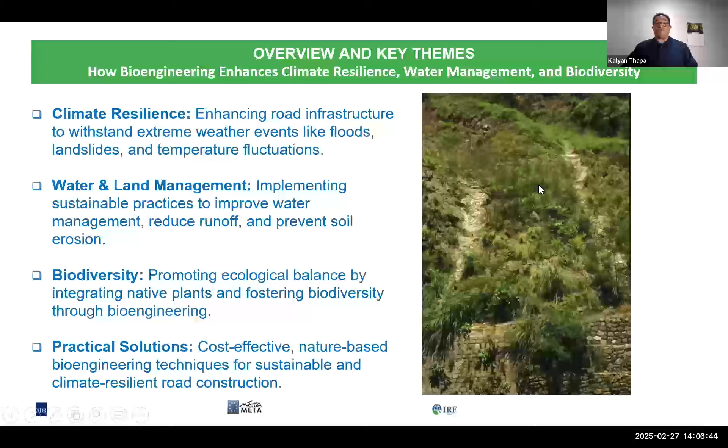On the slopes here, gully erosion has been protected by using stone pitching and check dams, and on the roadside there are retaining wall structures and different kinds of vegetation approaches on the slopes for the practical solutions. So these are the key themes of our session today.

Here, I tried to touch on advancing the UN Sustainable Development Goals through bioengineering in road infrastructure. It is quite fortunate to have bioengineering in transport sectors focused on by the UN Sustainable Goals by 2030. The slide I have taken from Mr. Slobodan. He has written wonderful articles on the report's sustainability 2021.

I highly encourage you to get these articles, where he has focused on how bioengineering can emerge in every sector of infrastructure for climate resilience purposes. So there are four or five UN sustainable goals, and UN Sustainable Goal 13, climate action, helps reduce carbon footprints and improve climate resilience.

And life on land, SDG 15, supports biodiversity by restoring habitats along roads. And clean water is the biggest issue. With bioengineering, it improves water management and reduces runoff.

This pretty much ties into the work of experts like Mr. Slobodan, who discusses bioengineering's role in climate resilience infrastructure. So please look into his article too. He published that article in 2021, which is currently focused on bioengineering in the UN Sustainable Development Goals.

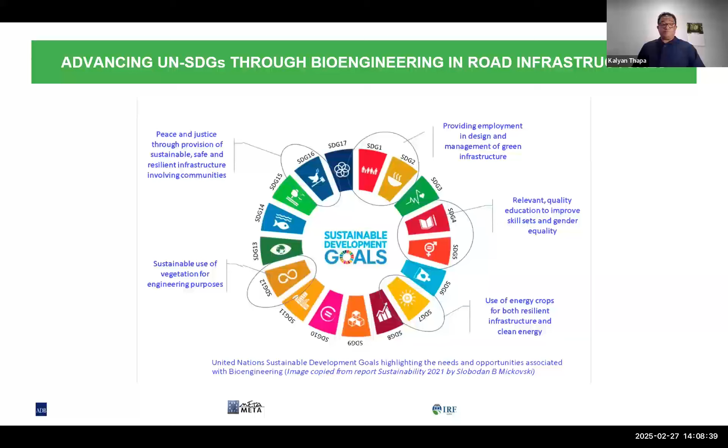So my fourth slide is about climate risks in green road infrastructures. Here we see different pictures of what roads face from climate change and the risks to the roads, including flooding, gully erosion, and landslides. These risks damage infrastructure and disrupt travel. Implementing bioengineering techniques like stabilizing slopes and managing water flow can help mitigate these challenges and make roads more resilient to climate impacts.

So these are generally not only for green roads, but any transport sector you will see due to climate change. These are the areas: big gullies, landslides on the roads, even in the communities and habitation areas, big landslides, because these can be caused by both natural and man-made causes. But due to the climate change effect, these are the main areas we are facing in the climate risks in green road infrastructures.

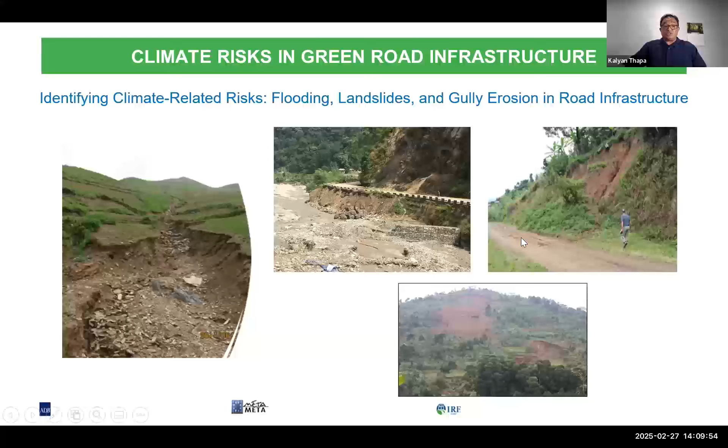So on my fifth slide, we examine how erosion impacts green roads and how bioengineering can address this issue. The images showcase techniques like planting native vegetation, using erosion control measures, and implementing natural retaining walls. These solutions prevent soil erosion and improve road resilience. I think it is very essential for professionals to understand local conditions, soil, vegetation, and weather patterns. When planning bioengineering solutions, engaging local communities ensures the solutions are sustainable, effective, and culturally appropriate.

So you can see in my photo on the left, some of the slopes need land use management and different kinds of techniques. And in the photos on the right, gabion walls or retaining walls are needed, and debris removal is needed. So what I'm trying to insist here is that any of the experts working on bioengineering in the road sector, basically in green roads, have to be able to assess this in great detail. So these are the effective measures for erosion control and slope management, if you have detailed assessments of the roadside slopes.

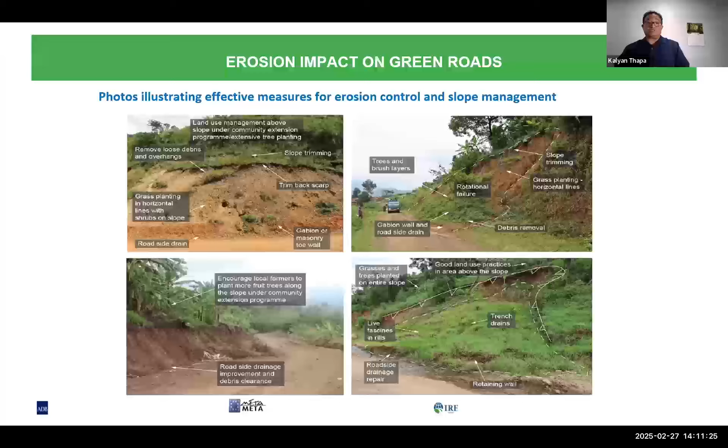So on this slide, I'm slowly merging into bioengineering for slope stabilization and erosion control. Sustainable solutions for a resilient future. What is bioengineering? Why does bioengineering matter? Global application of bioengineering and proven techniques for success. Bioengineering is a very powerful method for slope stabilization and erosion control. By using natural materials like plants and grasses, it addresses erosion and slope instability in an eco-friendly way. This approach not only stabilizes slopes, but also enhances ecosystem restoration, creating a harmonious relationship between infrastructure and nature.

Bioengineering has proven very effective worldwide, and the practice started from the east, where I started from the very beginning, in Nepal, and slowly it came to different Southeast Asia and Pacific regions, and now it's also starting in North America. So these are very cost-effective techniques. As you can see in the pictures, some of the techniques we are using are very much nature-based and have a carbon zero effect. So that is what bioengineering does on roadside slopes. So it's a global practice, and there's a standard developed. It's very much used worldwide so far.

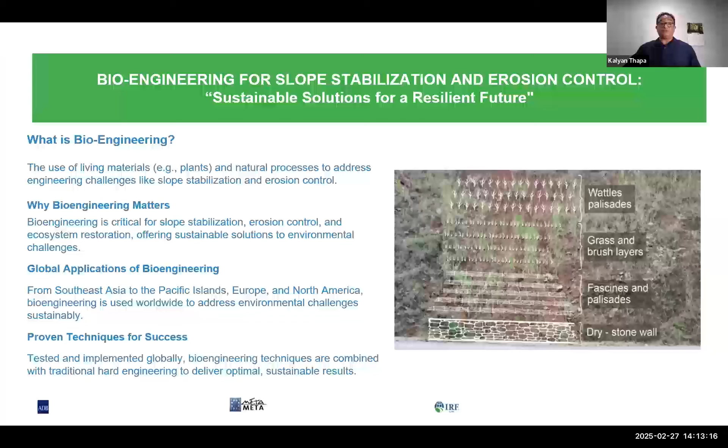Okay. Then we have to understand the benefits of bioengineering, why we need to address bioengineering. What is the effect? So I'm trying to show here the environmental, economic, and social benefits. Environmentally, it restores habitats, improves biodiversity, and reduces erosion, making ecosystems more resilient to extreme weather. Economically, it is a great cost-effective alternative using locally sourced materials and reducing maintenance and repair costs over time. Socially, bioengineering fosters community engagement, improves local knowledge, and creates a safer, greener environment that enhances the quality of people's lives. In short, bioengineering not only supports sustainable infrastructure, but also contributes to environmental protection, economic growth, and community well-being.

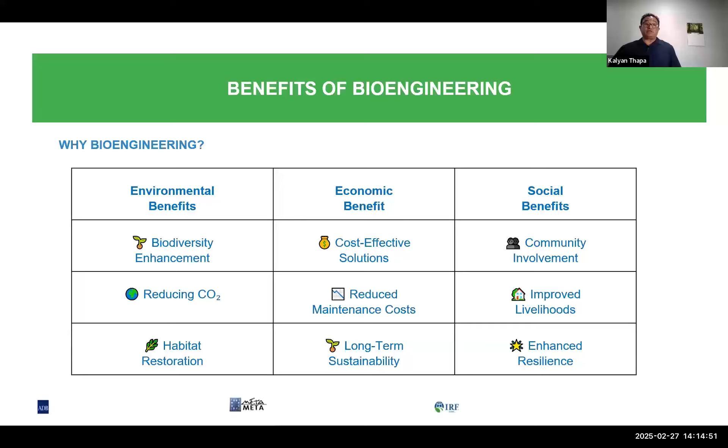So there are all these three sectors. If you work at a very micro level, you will get all these three benefits implementing bioengineering in any infrastructure, not only green roads. Any infrastructure project can have all three of these benefits while implementing bioengineering techniques. So this is effective bioengineering practice.

I'm very much fond of this slide, though this slide's so very old, and I'm very nostalgic also, because this is all I've taken from Nepal, where I started my career in bioengineering, and I worked with very reputed bioengineering consultants like John Howell and Dr. Jan Clark, Dr. Krip Lawrence in Nepal.

These are the pioneers of bioengineering. We started bioengineering in Nepal. They used to say not bioengineering, not nature-based; they simply used to say soil conservation when we were starting bioengineering in Nepal in 1986. And they were ahead of time. And on the slide you can see in picture one.

There are lots of practices like cut and fill practices, which created lots of problems during the time. The haphazard practice of soil dumping causes lots of problems. Not only the erosion, but it also damages lots of natural heritage and natural resources there. But there was also a practice of how we could protect that.

Like you can see on photo two here, the gully is strengthened using beautifully created small check dams. These small check dams were very much useful for strengthening the gullies. And in the third picture here, you see stone pitching on the small gully.

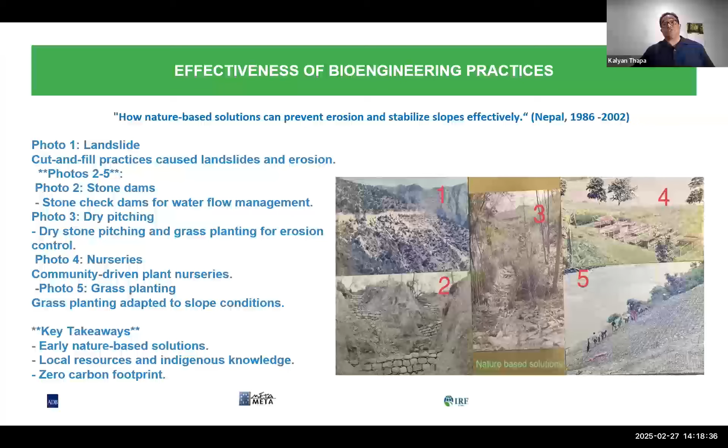So these are the effective bioengineering practices. It doesn't mean they have not been carried over; they have been carried over. But this was the practice at the time while I was working in Nepal, from 1986 to 2002.

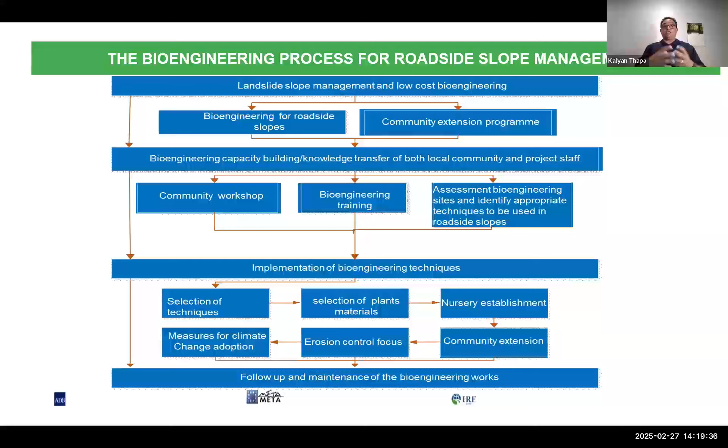Why I've been insisting on a community extension program here is because most of our roads nowadays either cross through community lands, or even if you build the road on isolated land, the community inhabits the newly built roads. So we should be working in conjunction with the local community for successful bioengineering implementation in any of the road sectors.

So I'm showing here the process, how we can train to do proper bioengineering, like a community workshop on bioengineering techniques, and we need to know how to assess a bioengineering site, then implement bioengineering techniques, with proper selection of techniques, and our focus should be on erosion control, but for the benefit of communities living around the land. So this is the process we generally developed now to work on any green road infrastructure, regardless of whether it is community oriented or not.

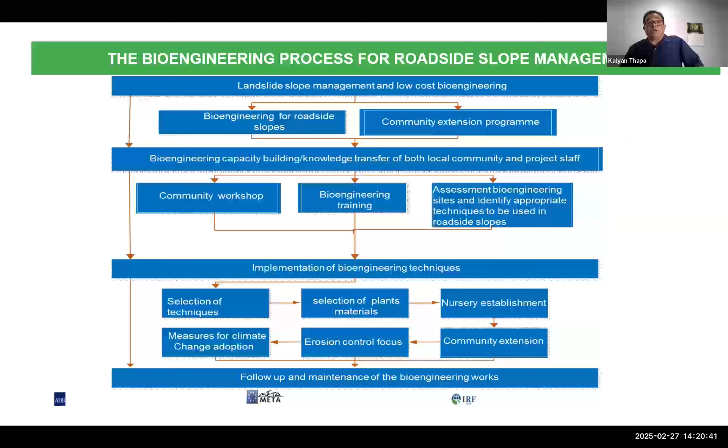In the next few slides, I also focus on the case studies and best practices of bioengineering around the world. So this slide is from Nepal, combating landslides with bioengineering. So what were the challenges, what were the solutions, what was the outcome? This one slide shows the roadside slope erosion that was there.

The challenge has always been that whenever we cut slopes and leave a bare surface, the slope starts eroding, regardless of whether it's small or large. And then what happens? There are big landslides, or even if there is no landslide, even if you cut the slope at a certain angle, it still gets surface erosion and starts blocking your beautifully constructed drain, and that leads to another problem.

So while you're implementing, if you focus on those challenges, or to prevent those challenges, just simple grass planting like this here, or brush layers, or different other techniques, implementing them can resolve the problem. So what would be the outcome? The outcome would be successful green slopes without any signs of erosion, and it can be useful for the local community. The local communities can get benefit out of it, and it will be more long-term sustainability.

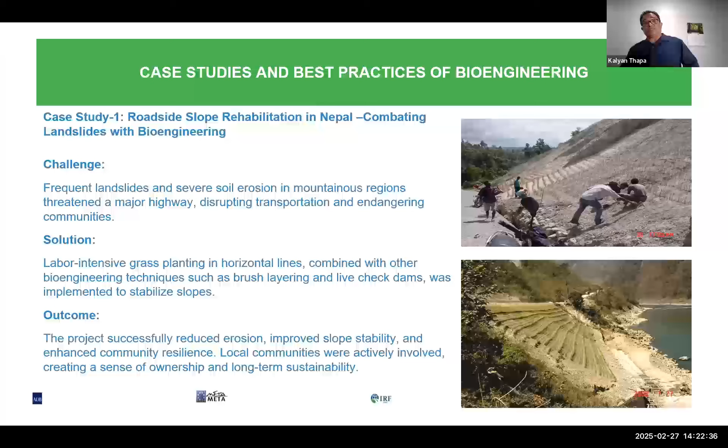But what we do there, very simple bioengineering techniques, like simple rows of grass plantings, brush layers, helps a lot. But we need to know how to implement it, right? This is one of the sites in Nepal. And here, case study 2 is a project in Laos. They also implemented slowly the bioengineering of the slopes.

See on the side here, the same challenges like frequent landslides and severe soil erosion in mountain regions. It's always a problem. The mountains and slopes are very fragile, very unstable, very young geology. So severe erosion problems, and that impacts the livelihoods of the local people. So solutions like simple plantings, just focusing the bioengineering or vegetation techniques on the slopes, the roads become very healthy. It looks very, you know, environmentally friendly also.

And it looks wonderful. If you see the slope, the picture at the bottom, see the beautifully constructed retaining walls and the slopes are vegetated, green. And if you drive on this kind of road you won't see any signs of soils accumulating, debris accumulating on the drainages. So that successfully reduced erosion by 50%, improved slope stability and enhanced community resilience.

And what we'll get, the community will be very happy, and the maintenance cost for the road itself, not the slopes, but the roads itself will be much less, because if there are no soils on the drainage, drain cleaning cost is going to be reduced. But imagine if you don't have anything done on the slopes, there's going to be a huge problem. Either it's going to create a big landslide, or continuous erosion is going to bury all the roads or the drainage. Okay, so those are the outcomes of implementing or practicing bioengineering.

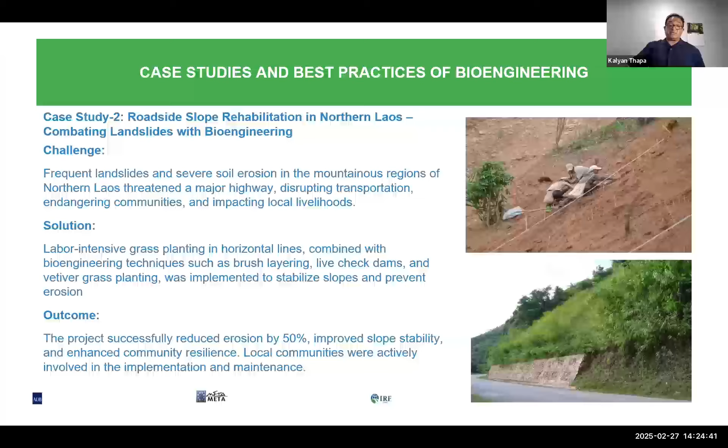There are not always good practices also. Some of the things they try. This is one slide from Bangladesh. The challenge was slope erosion, and the practices done were this kind of sandbag filling, and you often see those kinds of practices, either covering the slopes with tarpaulin sheets or sandbags or huge riprap techniques.

Are these techniques always good? As an expert working in bioengineering, I would say no, because these are very temporary measures, because you always get problems, because underneath there's always erosion. So these are not very permanent practices. So we suggest to put more vegetative measures. There are other vegetative measures which are going to be sustainable, long-term, and more effective. Because when you put the sandbags here, it's maybe 1 year or 2 years. After that, it's going to deteriorate and the whole slope is going to move again. So the situation will be the same.

So if you put more bioengineering measures like vegetation stabilization, live drains, brush layers, it all depends on the site. That's why I was talking in my first slide about assessment. What are the techniques needed? What are the problems? So if you properly assess the sites, then we can fix those with green bioengineering techniques, which will have ecological benefits too.

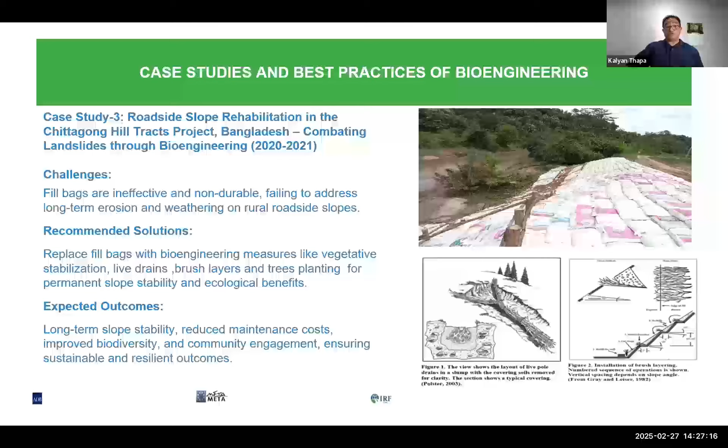So this is one slide in DPR Korea, usually we say North Korea. I was fortunate to be there and to do the work with the SDC, Swiss Development Cooperation, from 2015 to 2020. During that time, one of the very serious problems was soil erosion in North Korea. And that's not for the structures, but I see the problem for food, because they had to use all their lands to grow crops. Without using their land, they don't get food. So over time, using the lands, there was so much erosion.

And then SDC came forward to mitigate that erosion problem using different expertise: agroforestry, foresters, and I was the one working on the bioengineering, how we can reduce it. It had huge gully erosion problems, using the land too much.

So I was able to do pure nature-based solutions using only the plants and vegetation, because there was nothing we could get there. No way to get any kind of engineering materials there in North Korea. So I had to rely on totally nature-based solutions, training them how to use all the effective bioengineering measures, different structural techniques. So this was the turnout.

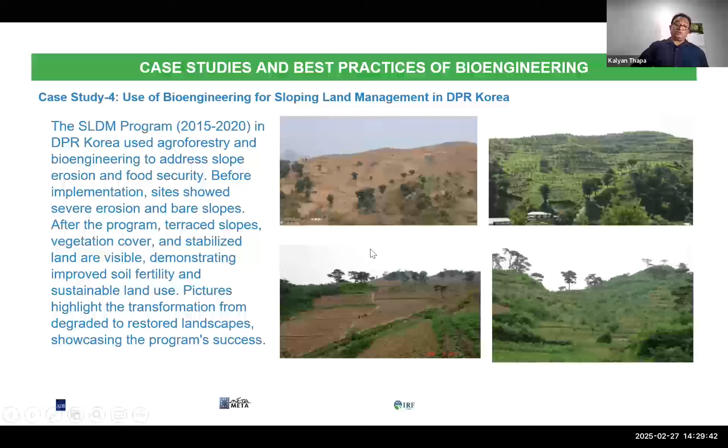So one of the very successful projects, working with the local community and using natural solutions. One of the most successful projects I was ever involved in during my career. And I'm very satisfied working there with the communities in terms of erosion control.

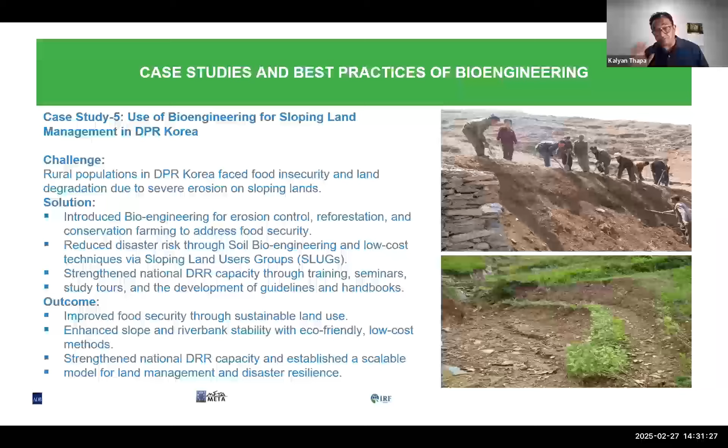And I was one of the fortunate people involved in utilizing different plant materials. Fortunately, there are some species which grow on very toxic materials, like willow and cottonwood species, which are very popular here in North America. So we used these for the toxic materials, because the roots extract the toxic materials and evaporate them to the environment through the plant systems.

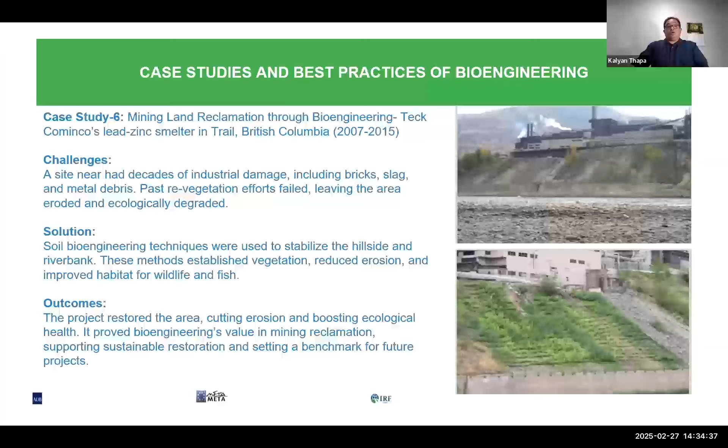If it's very wet, it doesn't stay that long. Even if you have a treated log wall, it has a lifespan of 10, 12 years, but after that it's going to start deteriorating. So what we did is we just replaced these walls and started a vegetative wall. So we put in the vegetative wattles.

So we suggested a very friendly, low cost and sustainable technique, which was a bioengineering wattle fence. So you use the wattle fence, and within one year, that turns out very green, very stable, and it's a very simple technique. It looks very simple, but if you do it very technically and with some knowledge of the slope conditions and slope failure, we can get success on bigger slopes as well.

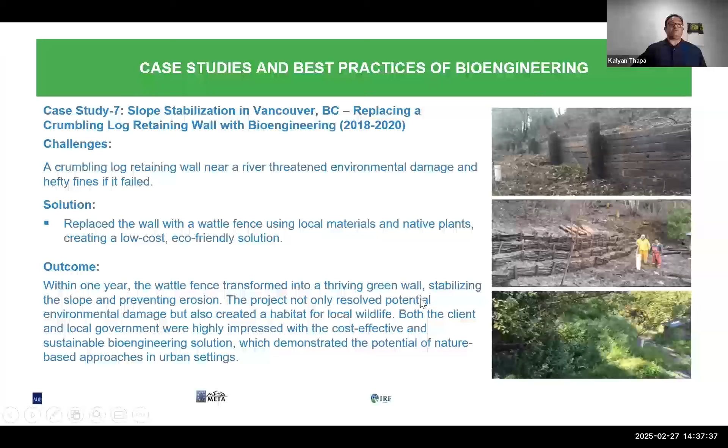But it all depends on what kind of materials you have. It also depends on the plants. You need to have plant selection, natural and good growth, good cuttings. If you get good plants, it can stabilize the slopes. But this is mostly biotechnical structures like wattle fence, live pole drains, planting cuttings. These big slopes all stabilized. Mostly the outcome was site rehabilitated in 1 year, reduced seepage erosion, mud flows, stable slopes with thriving vegetation.

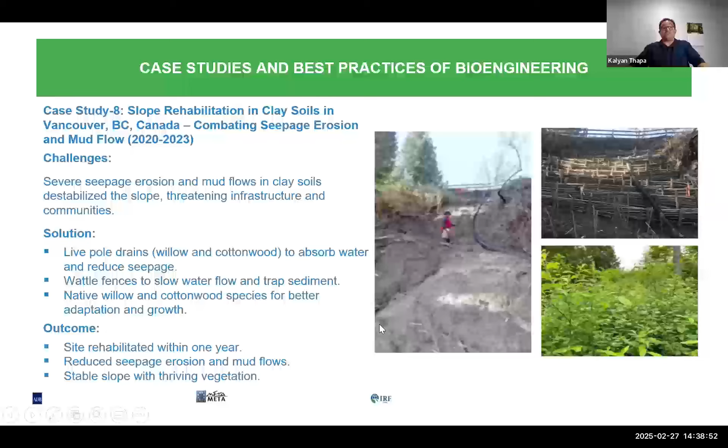And in the practice of bioengineering, one of the very best techniques for riverbank protection in the aspect of fish habitat is called vegetated riprap. So if you see any culvert abutment fail, bridge abutment fail, it can be fixed with simple vegetative techniques. The vegetative technique is using different sizes of rocks and planting cuttings in between the rocks, which can grow. There is a certain way to do it, but it's a very simple process; sometimes we can use a machine, sometimes we can do it manually. So it can fix small to large scale failures, embankment failures.

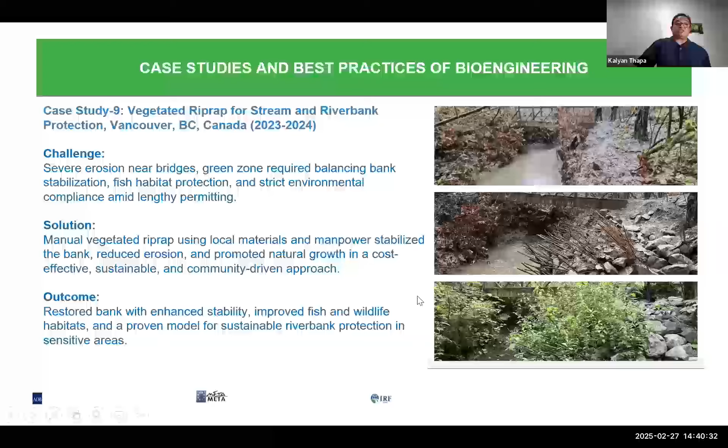In Europe, they have been using it a lot. They have been demolishing all the concrete structures and putting vegetation riprap on the big riversides. Before, they used to do all cement structures. Now, looking at the environment friendly and green aspect, they've been using this vegetation riprap. Vegetation riprap is one of the best solutions for fish habitat. The fish love it. In the third picture here, when the plants grow, the fish come and hatch. It's good habitat for the fish. So this is a very simple technique we can use as vegetation riprap as part of bioengineering programs.

So yeah, those are the few slides on the case studies on bioengineering. But now I want to go more into empowering youth and communities, how we can participate in the communities and bioengineering, and what the advantage is.

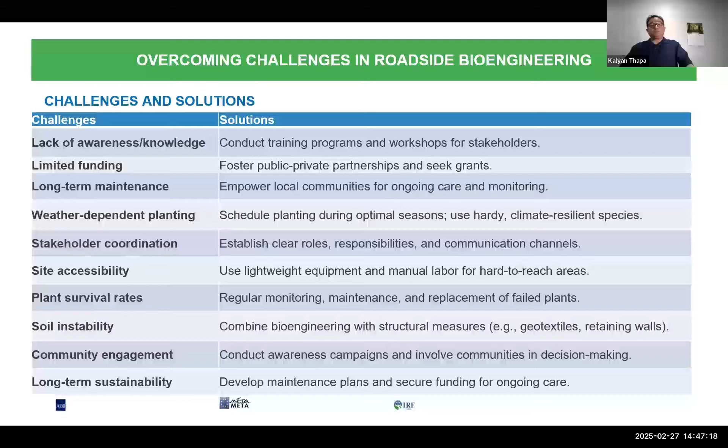So if you look at the challenges properly, have proper solutions for them, and do micro studies in this area, the ultimate goal is successful bioengineering by overcoming the challenges. There will always be solutions. But most of the time we have not been looking in detail at these challenges and solutions. So if you look into these areas, it helps, and that's the objective of this slide too. So now we're going to go to some climate adaptive plants and materials.

Whatever the programs, plans, whatever challenges you have, even if you get all the funding and have good programs in place, plants are the main part of a successful bioengineering program. And nowadays, because of climate change, we have to be very careful in selecting climate-adapted plants and materials. Choosing the right plants is key to the success of a bioengineering project.

Climate-adapted species such as grasses, small shrubs, and bamboos help stabilize soils and reduce erosion. In any project, local communities are the best resource for selecting bioengineering plant species because they have better knowledge. But as experts, anyone involved needs to know what kind of species is better on the slopes, because our purpose is erosion control. So you have to find erosion control species with bigger, vigorous root systems, and select those.

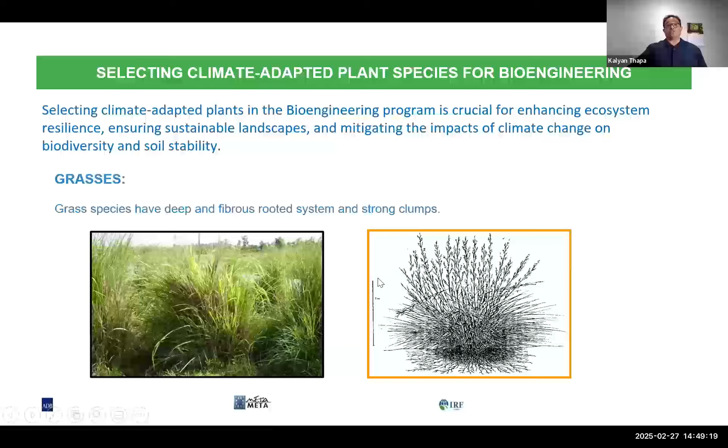Second is the trees or small shrubs. Small-sized trees are always good on the slopes. So we have to find what kind of root systems are there, what the canopies provide, and what kind of leaves there are. So it has to be a very detailed

site plant selection. In fact, it's always better to involve biologists, tree experts, plant experts, or plant ecologists in assessing the slopes. But unfortunately, sometimes the bioengineering expert has to work in all areas. So any expert working in bioengineering should have broad knowledge of selecting bioengineering plant species. As I said, having local community knowledge is always beneficial for selecting plant species.

So there are many species, but there are three categories. One is the grasses, second is the trees and shrubs. I prefer shrubs rather than trees because when trees get bigger, they themselves cause instability on the slopes. So small shrubs are always better.

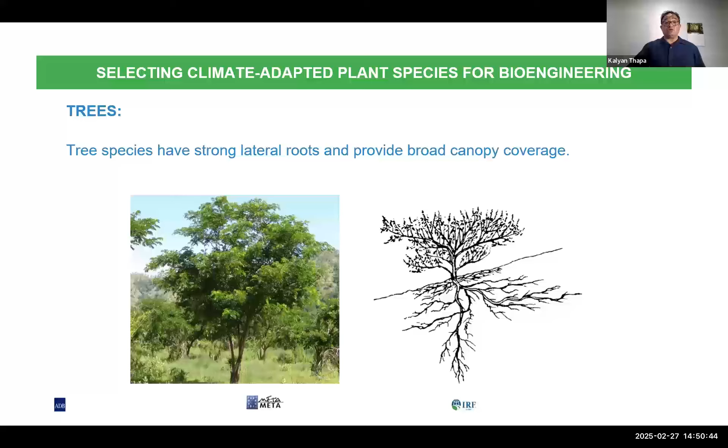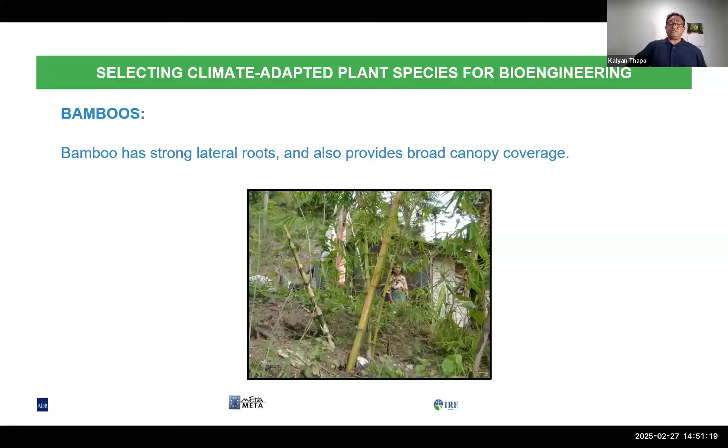And in Southeast Asia, bamboo is the best species. It has commercial value. Local people use it for different purposes, for food, firewood, building structures, or ornamentals. And it is one of the best species for any sort of erosion control, if you know where you are putting those plants. So those are the three species I favor. Besides that, there are many other live cutting species which you can use in bioengineering.

Kalyan, we need you to go a little bit faster in your last few slides so that we have time to answer some of the questions that we've already received. Okay, thank you. This is the training only. I'm almost done, I guess.

Bioengineering training courses are also important. Even hands-on trainings or beginner training programs for supervisors and engineers are always beneficial before you start any project. Most of the time, projects fail because of not having proper knowledge and training. So training is always important. At the supervisor, overseer, and engineer levels, we can do theory and practice training. And there are readily available training materials for bioengineering.

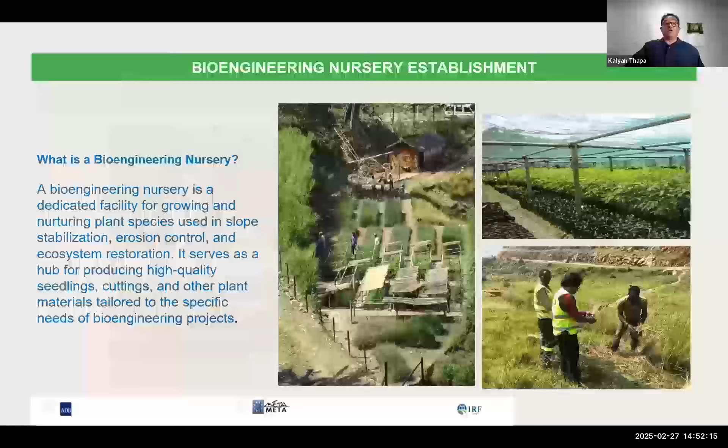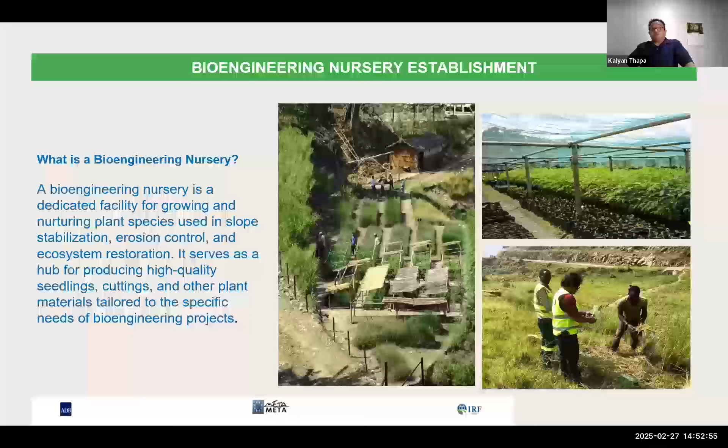Bioengineering nursery establishment: one of the best sources of plants is the nursery, where we can get healthy, quality plants, and every bioengineering program needs bioengineering nurseries. So it's always good to have nurseries in roadside programs, where we can produce grasses or whatever species we need, if we have our own nursery facility. The bioengineering nursery is like a stock production area that supplies bioengineering plants for the sites.

Anyway, thank you. Over to Iris. Okay, thank you, Kalyan, for that presentation. And we have quite a bit of questions from our participants, 102 of them this afternoon. So we will go rapid fire because we went a little bit over time on the presentation.